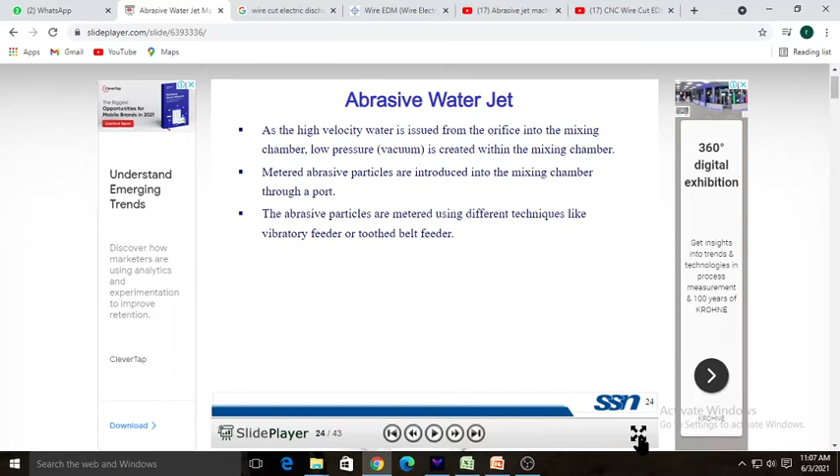Abrasive water jet machining, in short named AWJM. What is this abrasive jet machining?

As a high velocity water is issued from the orifice into the mixing chamber, a low pressure vacuum is created within the mixing chamber. The name itself tells that abrasive jet machining means machining by using the water jet, mixed with abrasive particles. Metered abrasive particles are introduced into the mixing chamber through a port, using techniques like vibratory feeder or toothed belt feeder.

So how are we going to achieve this? We are going to see in today's section.

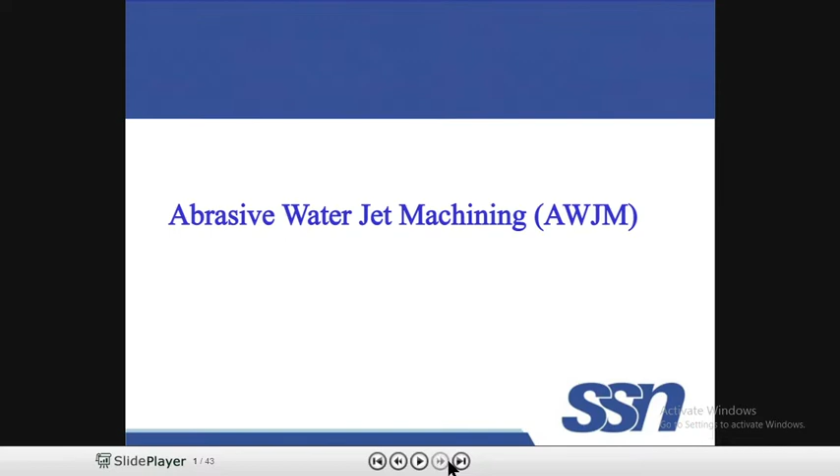What is this water jet machining or abrasive jet machining? It is suitable for cutting plastics, foods, rubber insulations, automotive carpeting and headliners. We are going to use this abrasive water jet machining. Harder materials can also be machined by using this AWJM.

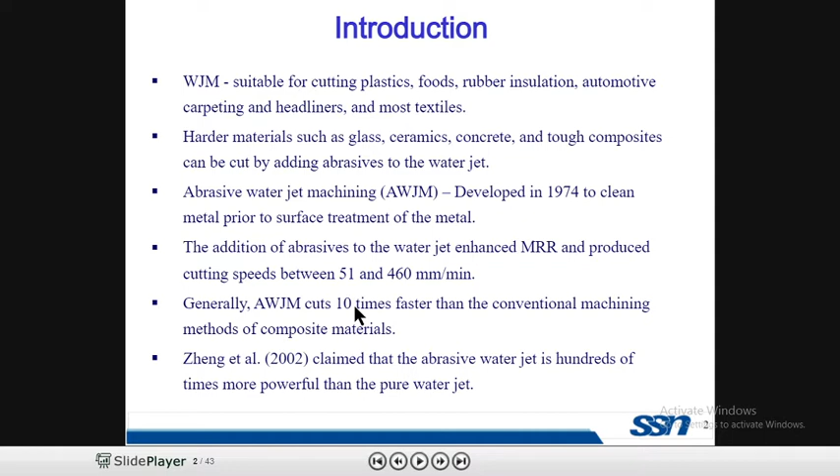It was developed in 1974 to clean metal prior to surface treatment. The addition of abrasives to the water jet enhances MRR, material removal rate, producing cutting speeds between 51 and 460 mm per minute. Generally, abrasive water jet machining cuts 10 times faster than conventional machining methods.

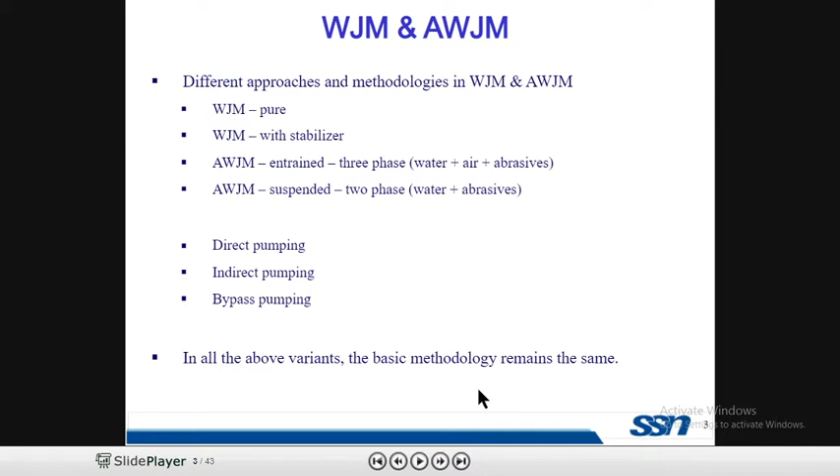If we use abrasive particles, it becomes abrasive water jet machining. Normally it is just water jet machining. There is a difference between water jet machining and abrasive water jet machining: the main difference is that in abrasive water jet machining we use abrasive particles along with the water jet.

The basic methodology is that water is pumped at sufficiently high pressure, 200 to 400 megapascal. The intensifier works as a device which intensifies the jet of water. Because of this, a high velocity of approximately 1000 meters per second jet of water is produced.

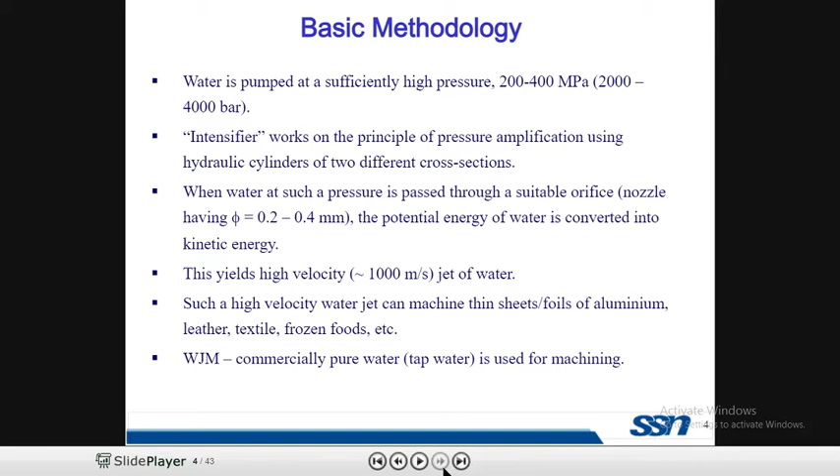Such a high velocity water jet can machine thin sheet foils of aluminium, leather, textiles, frozen foods, etc. In water jet machining, commercially pure water is used for machining, but in abrasive water jet machining we mix abrasive particles with water.

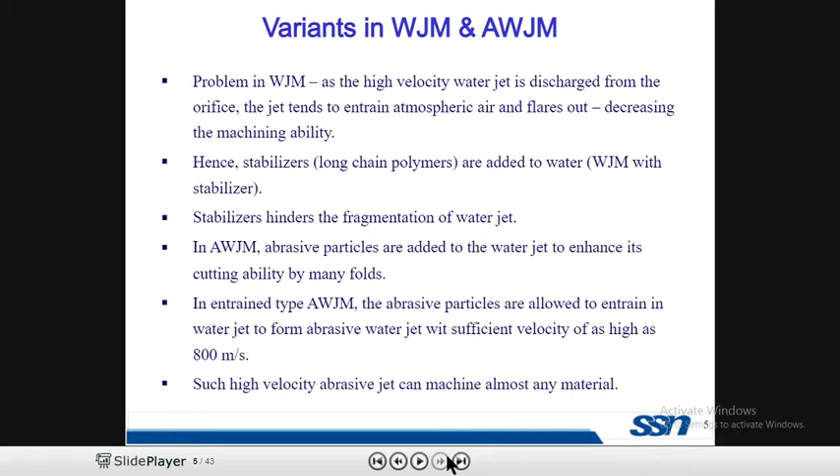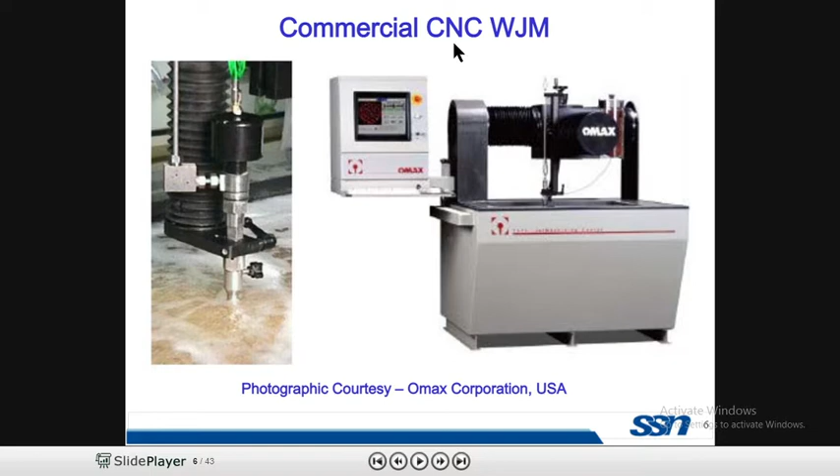In exam we only have to write the principle, construction, working and applications of water jet machining. The deep study is not present here. This is the schematic diagram of this CNC operated water jet machining.

The main applications can be paint remover, cleaning, cutting soft metal, cutting frozen meat, textiles, leather industry, mass immunization, surgery, peening, pocket milling. At all these places we can use the abrasive water jet machine for drilling and turning, and also nuclear plant dismantling.

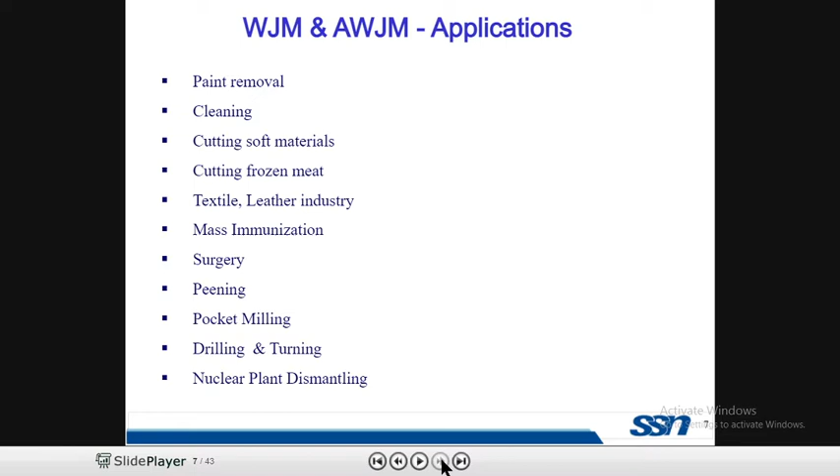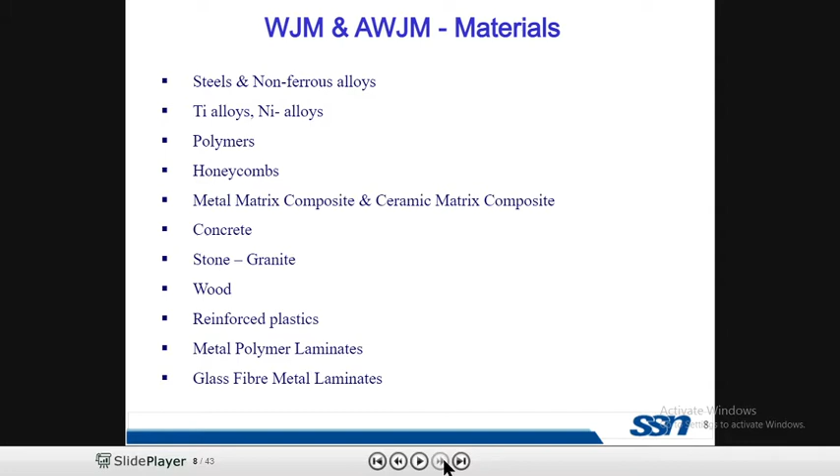The water jet machining and abrasive jet machining materials - on which materials can we use this? Steel, titanium alloy, nickel alloys, polymers, honeycombs, metal matrix composites, concrete, stone granite, wood, reinforced plastics, metal polymers, laminates, glass fiber metal laminates. All these are the materials on which abrasive water jet machining can be used.

The cutting ability of water jet machining can be improved drastically by adding hard and sharp abrasive particles into the water jet. Thus, water jet machining is typically used to cut softer and easier to machine materials like thin sheets and foils, non-ferrous metallic alloys, wood, textiles, honeycombs, polymers. Other than cutting and machining, high pressure water jet also finds application in paint removal, cleaning, surgery.

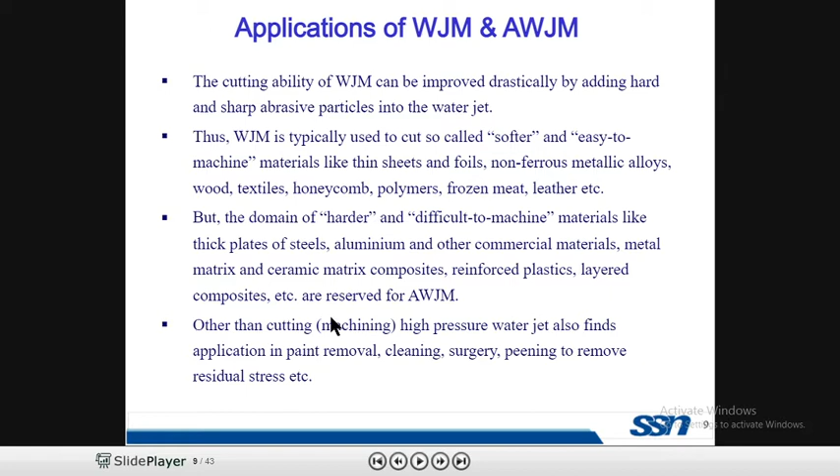It can also be used besides cutting for pocket milling, turning and drilling. One of the strategic areas for these various robotic abrasive water jet machining is finding critical application in dismantling the nuclear power plant. Dismantling means removing or disposing of the nuclear power plant. At that time also this water jet machining finds its particular application.

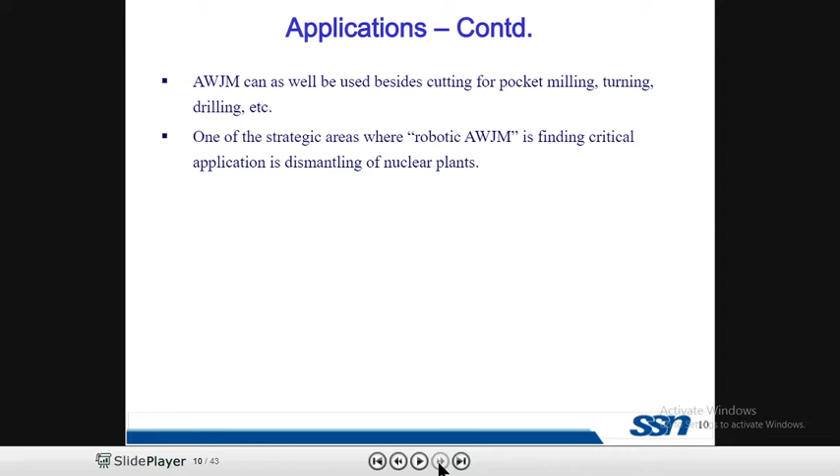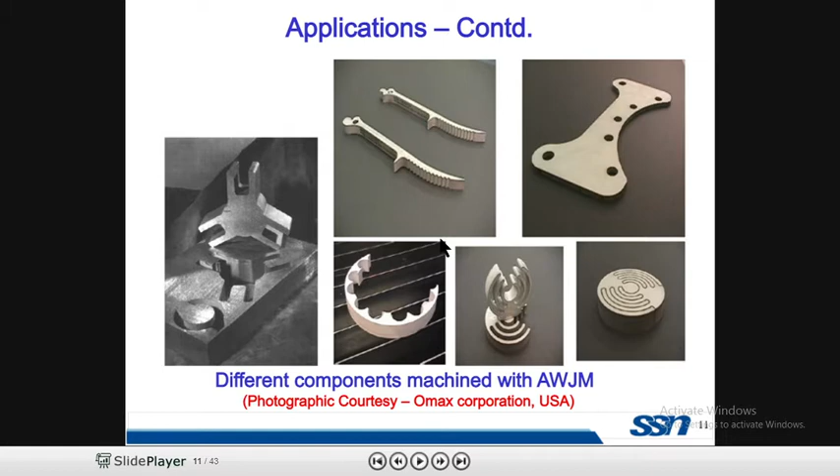These are some applications, or some samples which are created by using the abrasive water jet machining. I will show you one video of this abrasive water jet machining also.

The advantages of this are extremely fast setup and programming, with very little fixturing for the most part. It can machine virtually any 2D shape of any material. There are very low side forces during machining, almost no heat generated on the parts, and it can also machine thick plates.

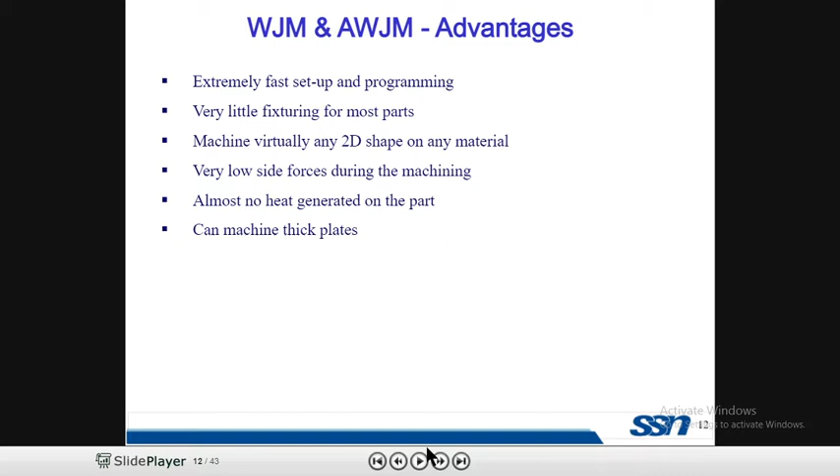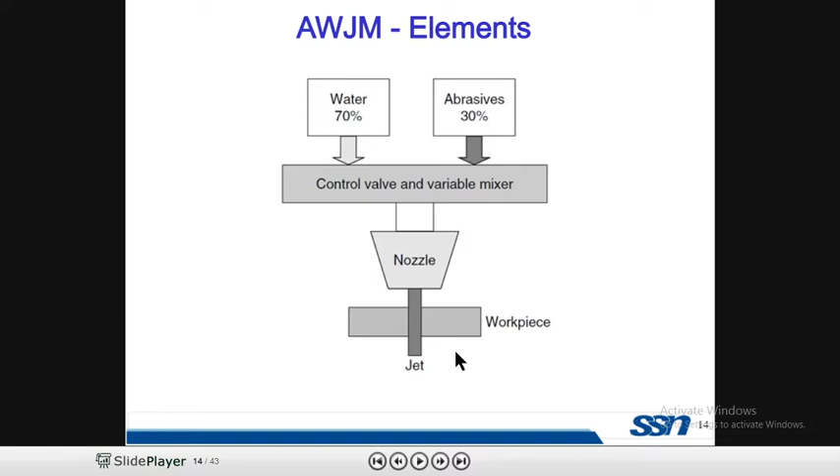70% water and abrasive particles are mixed together and forced through a nozzle in the form of a jet onto the workpiece, producing machining there. It is named abrasive water jet machining.

In abrasive water jet machining, the water jet accelerated abrasive particles, not the water, cause the material removal. After the pure water jet is created, abrasives are added using either the injection or suspension method. The important parameters of the abrasives are material structure, hardness, grain shape, size and distribution.

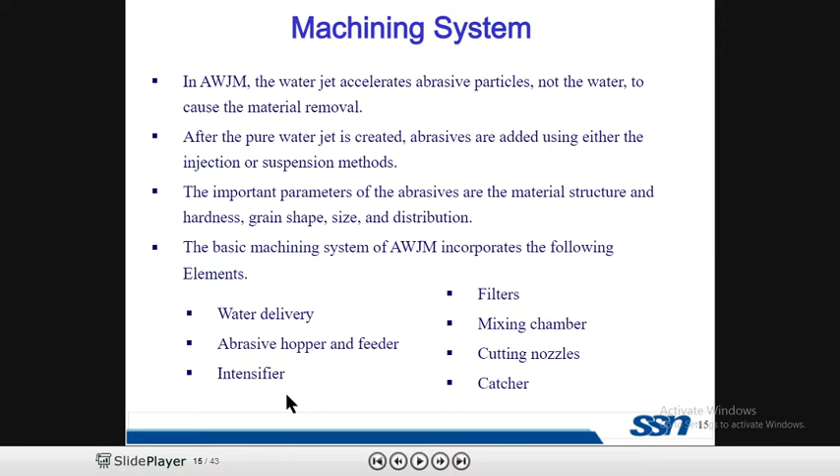The basic machining system of abrasive water jet machining contains water delivery, abrasive hopper or feeder, intensifier, filters, mixing chambers, cutting nozzles, and catchers. So this is the brief diagram.

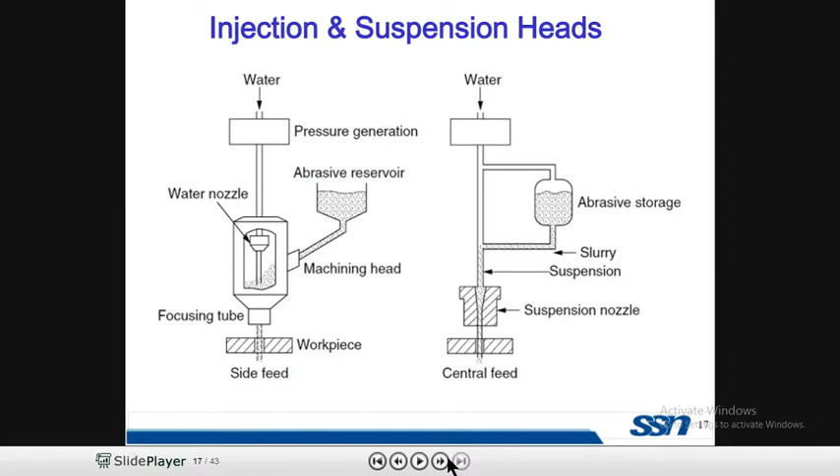That's an intensifier. This intensifier is driven by the hydraulic motor or hydraulic power pack, and it intensifies the water jet here.

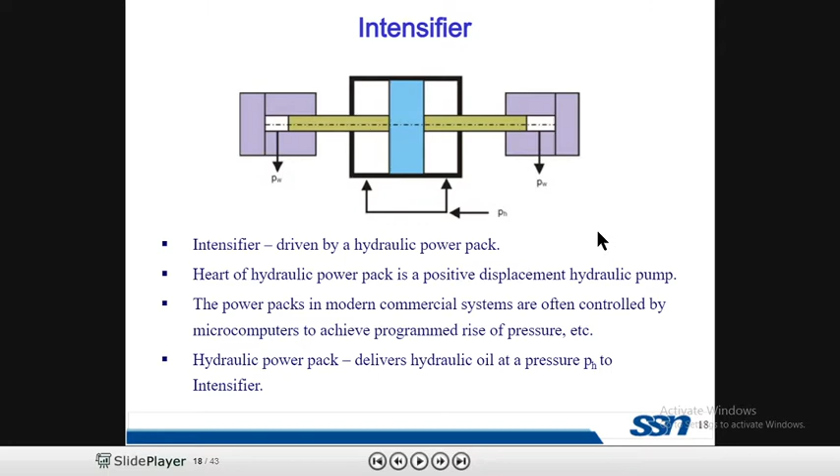We don't need to study all this in depth. We just need to know the working and construction, the working principle. We are not going to study it in deep.

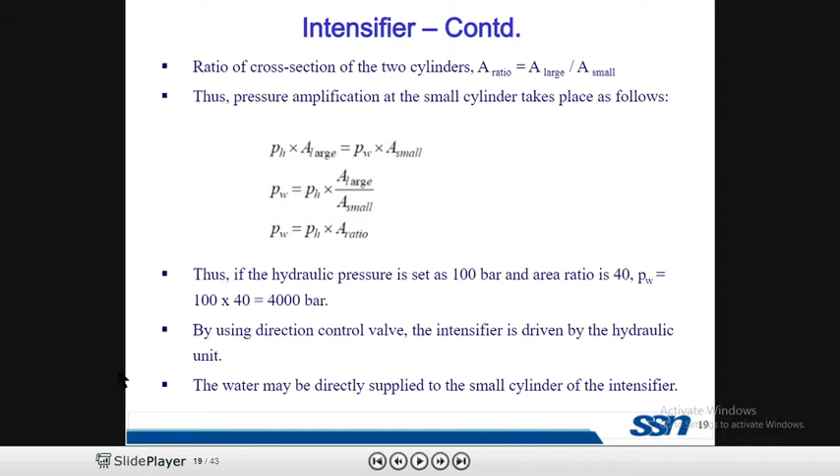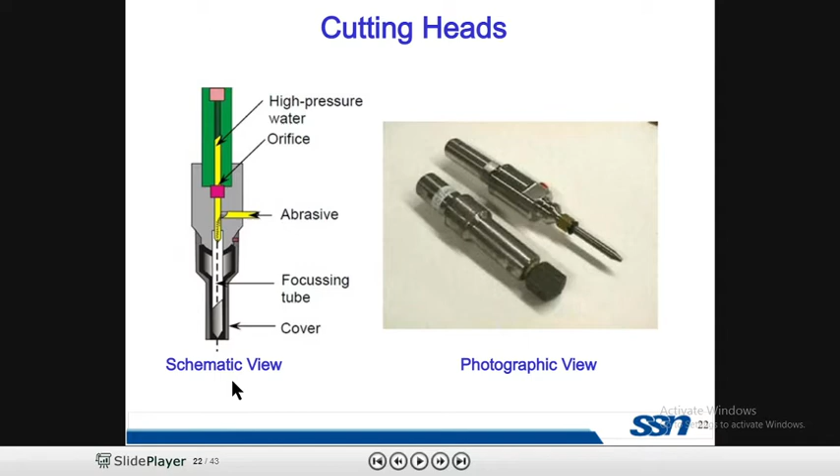Here you can see the cutting head, which has an orifice. Water comes through the orifice, then abrasive particles are added to the jet, and it is focused on the workpiece here.

As the high velocity water is issued from the orifice into the mixing chamber, a low pressure vacuum is created within the mixing chamber. Metered abrasive particles are introduced into the mixing chamber through a port, using techniques like a vibratory feeder or toothed belt feeder.

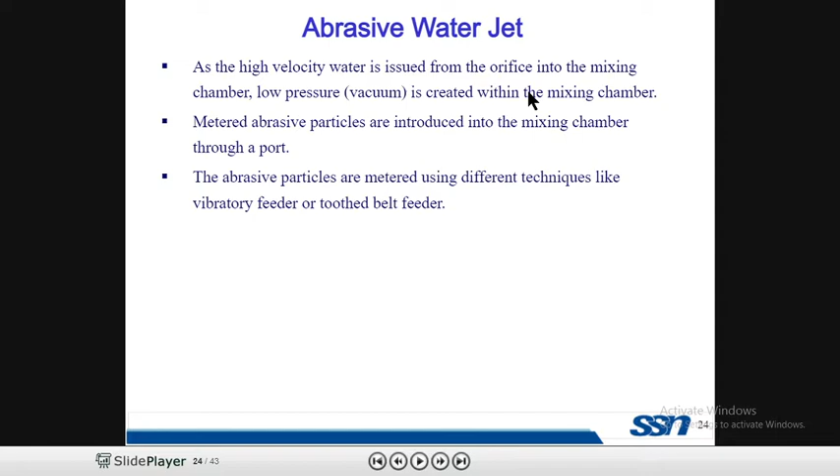In this way, we can achieve abrasive water jet machining. Here I am going to show you a video of this abrasive jet machining, so you can see how they actually achieve it. This is the nozzle through which a water jet along with abrasives comes out, moving on the workpiece and producing the desired machining there.

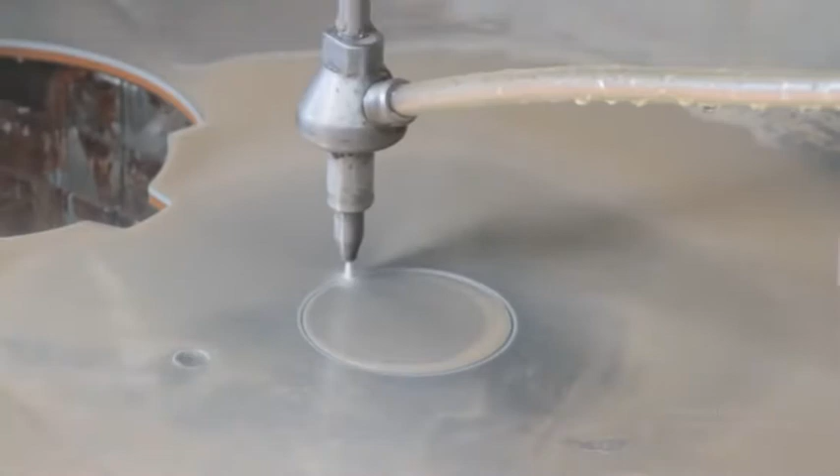A circular cutting is going on there. You can see the desired shape in any form can be obtained by moving the jet. Sometimes the jet is fixed and the workpiece is movable. Any type of shape can be cut here.

This is a computerized numerically controlled water jet. Without producing heat, it is machining here.

You can see how sharp the cutting is, and you can see the pressure of water which is produced by the intensifier.

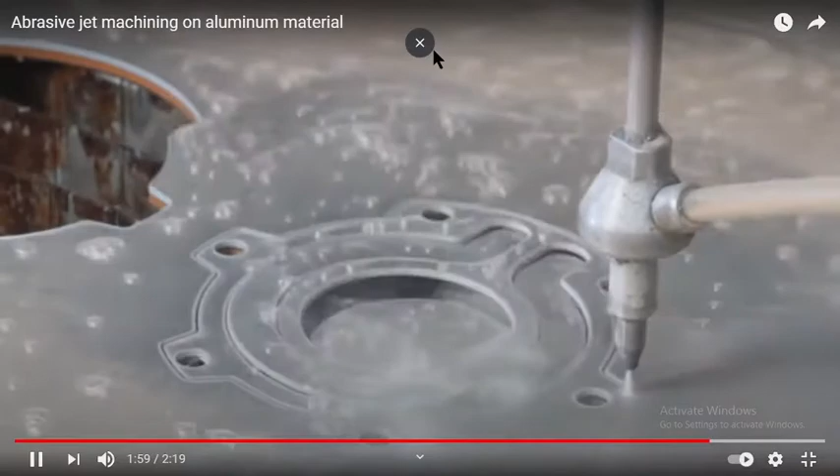You can see that any shape can be machined by using this abrasive water jet machining here. You can see the component here.

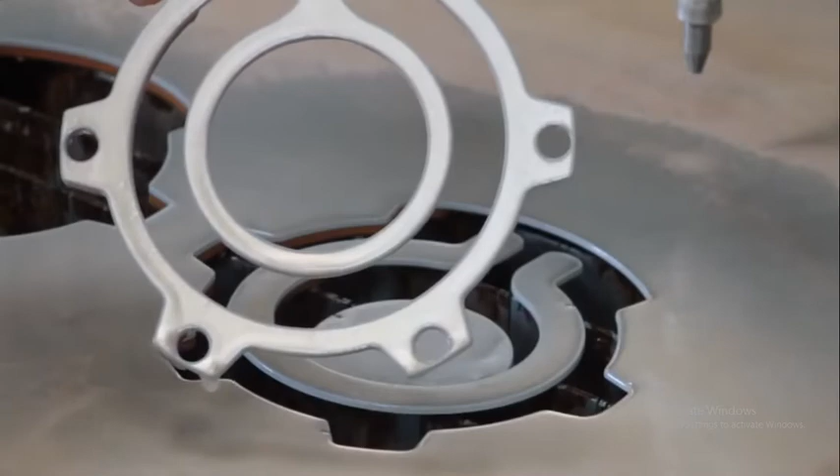Okay, so I think you get this topic of abrasive water jet machining. Now we are going to see today's another concept, which is electric wire discharge machining. Before starting this, I will show you the image of this.

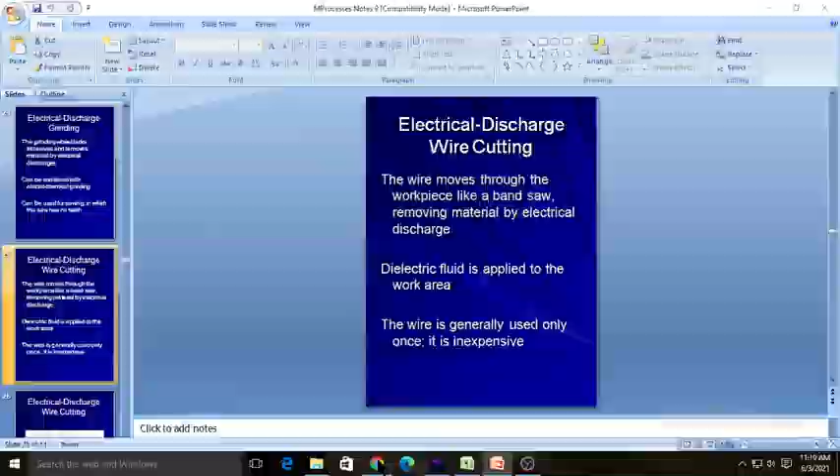Here you can see this is wire electric discharge machining. The name electric discharge machining means we use an electrode and remove material by creation of a spark. So here it is wire electric discharge, meaning the electrode is in the form of a wire.

As this wire is in the form of an electrode, when it is continuously moving through the workpiece, it produces a spark. Now we can move the workpiece or this wire electrode, and in this moment the spark is created and cutting of the workpiece is performed.

Now you can see that as the discharge spark is created and cutting takes place there, there will be the creation of heat.

So to eliminate that heat, we use deionized water as a cooling agent. You can either completely immerse the workpiece, or make a coolant nozzle arrangement, so that the workpiece will not get heated, the system remains cool, and thermal stresses will not be developed there.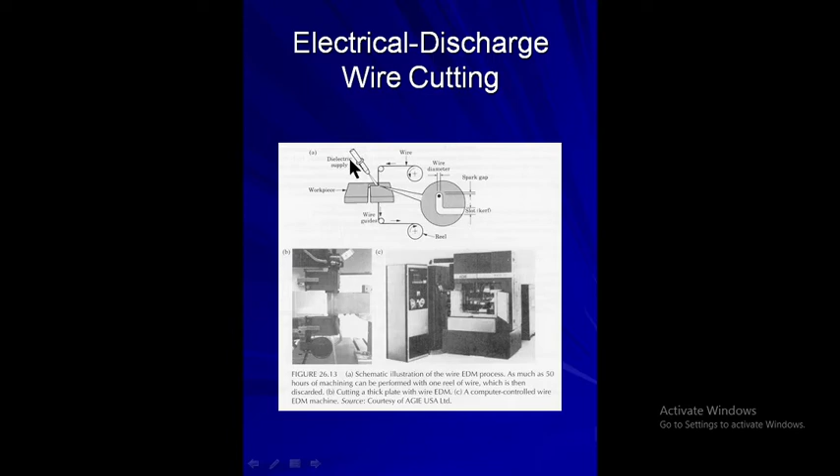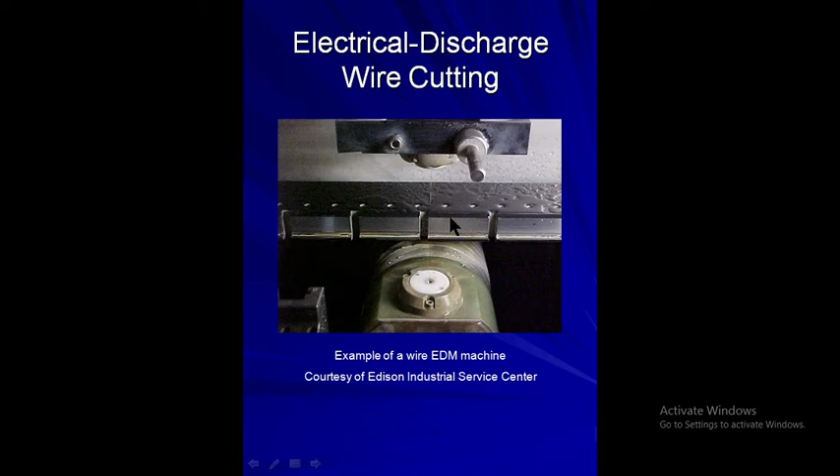Here again you can see the diagram. The wire is continuously feeding to this workpiece in a vertical way, and dielectric fluid is supplied there, which you may also call a coolant. This is the general machine of wire cutting. You can see this is the workpiece, and on this workpiece this wire is working as the electrode vertically, continuously moving through the workpiece, producing the slot or the machining.

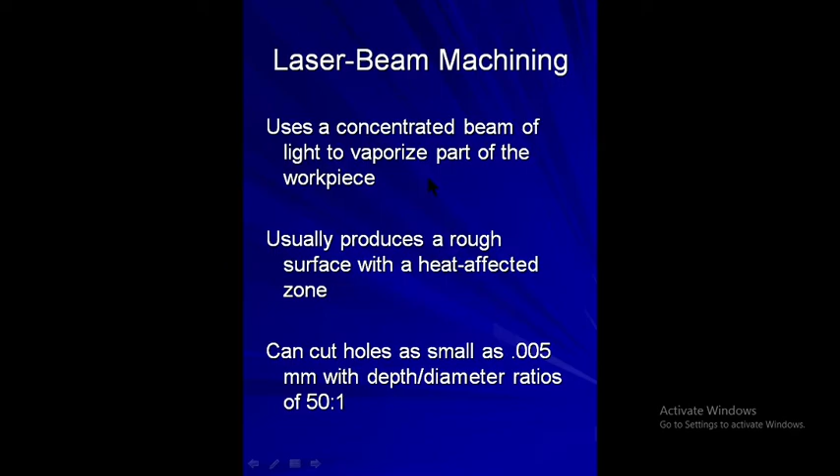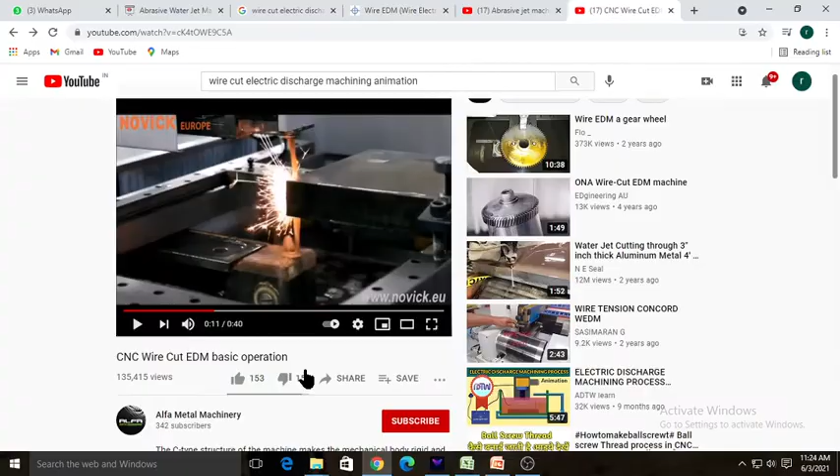Okay, so these are some tools which are created by using this wire cutting process. Here I am going to show you a video.

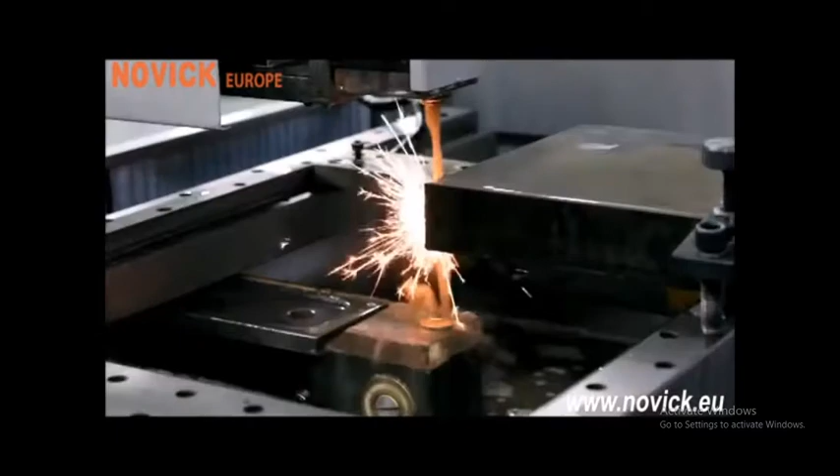Here you can see this wire, when it comes in contact with the workpiece, creates a spark. We are applying water, deionized water, as a dielectric medium, and as this wire moves forward, a spark is created along with it, and the cutting or slotting operation in the workpiece is performed.

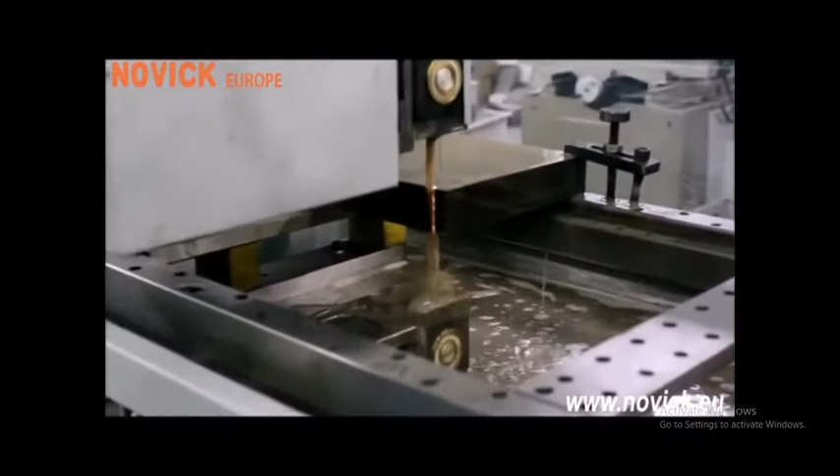You can see it on your screen. This is the dielectric fluid there, deionized water.

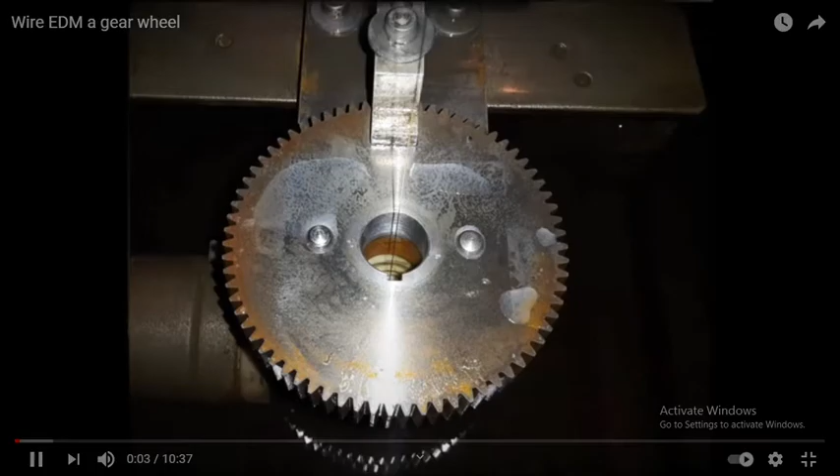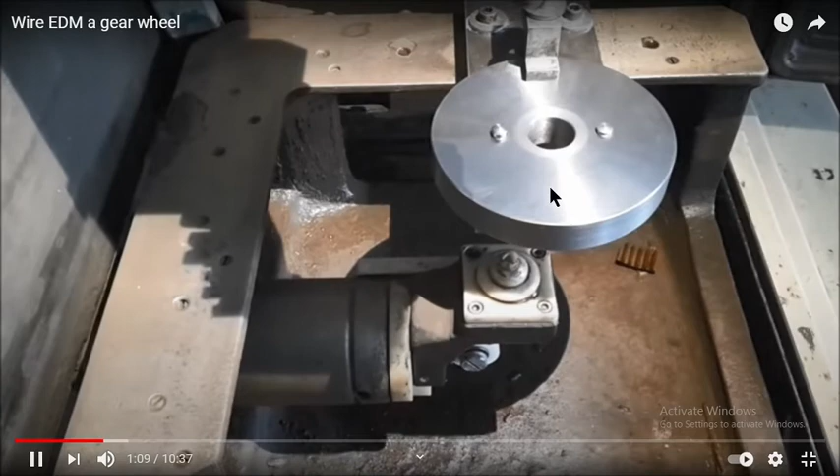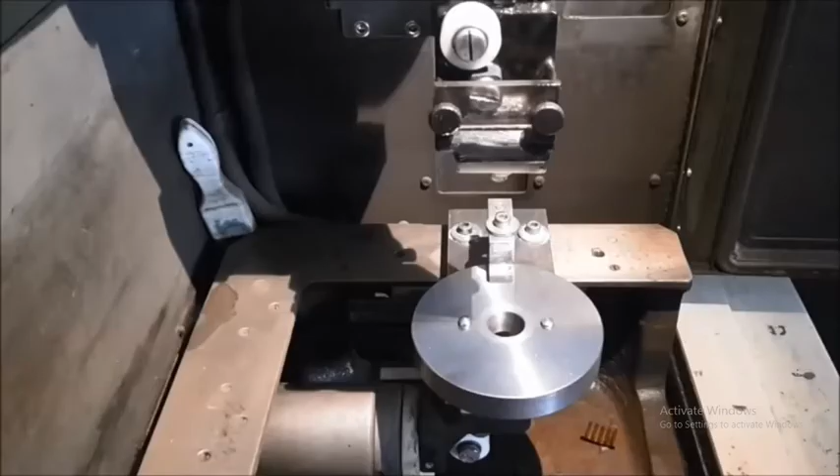Here you can see that cutting of a gear also takes place. Here is the wire electrode, and we are going to make a gear wheel. You can see when this wire comes in contact with this workpiece, it passes through the pre-drilled hole. Now this wire electrode is coming, and we are going to enter it into this gear wheel.

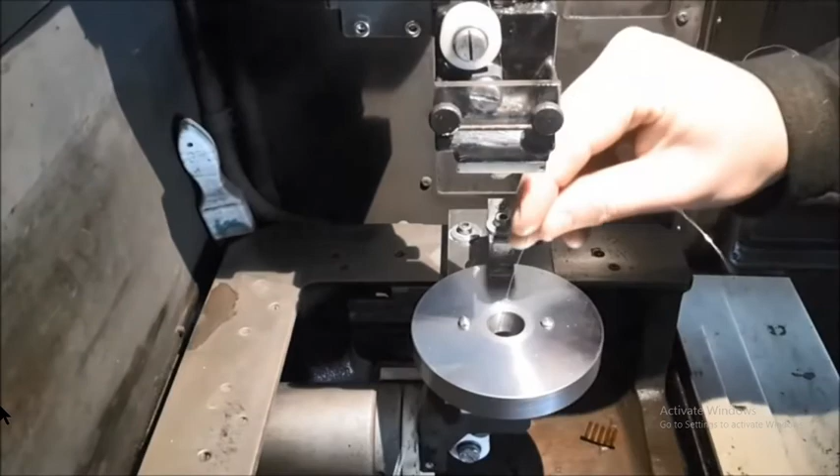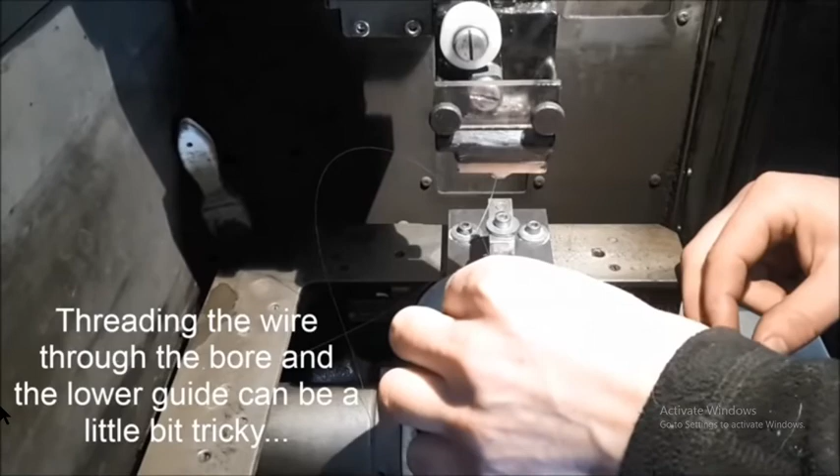You can see here this tiny wire is used to cut the gear. As this wire is too thin, it is inexpensive, and it wears out in this process, so we are going to use a new wire every time. Reuse of wire is not allowed here.

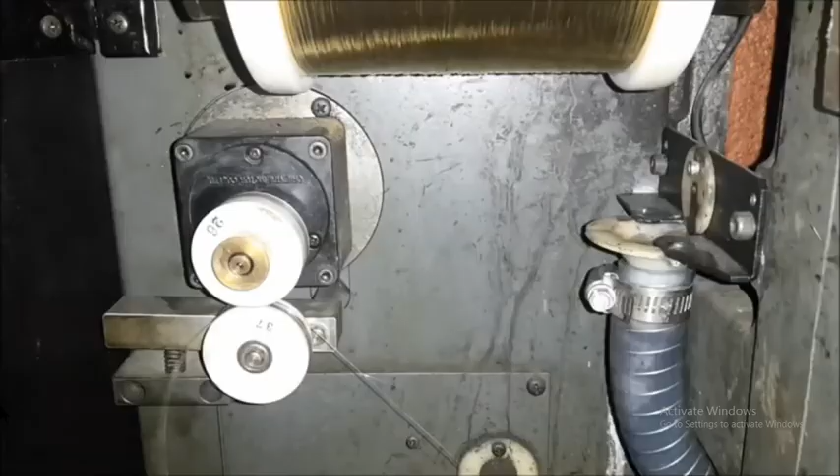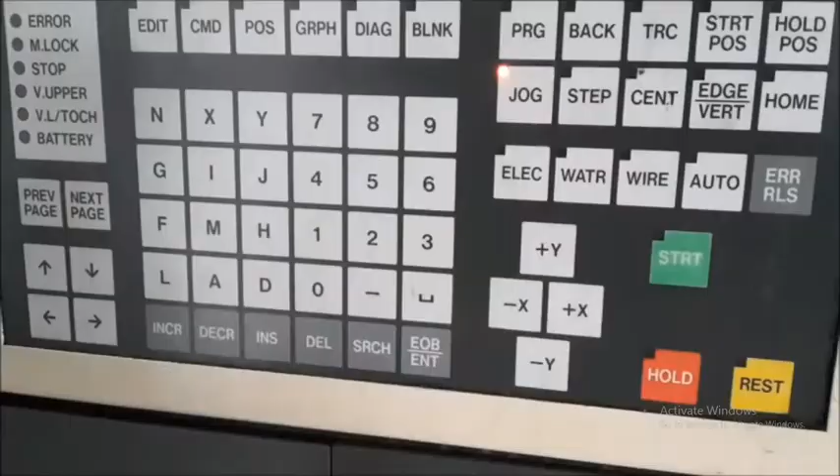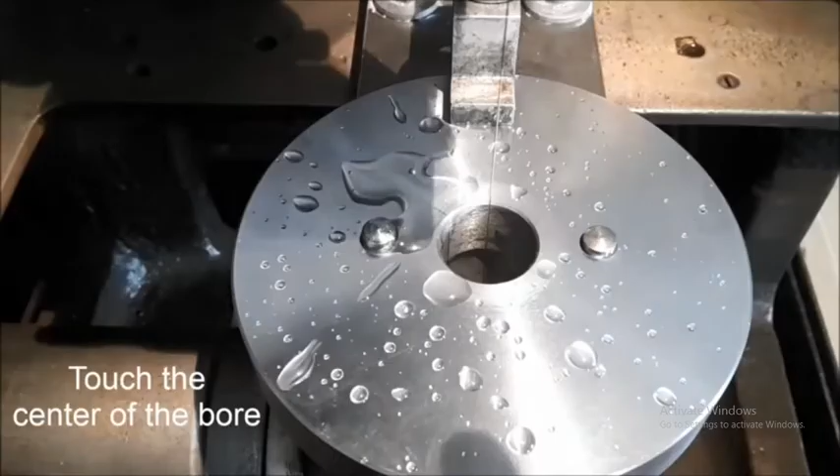Now this wire is installed on the pulleys. You can see these are the pulleys which make the motion of the wire through the workpiece in the vertical direction. You can see the wire arrangement here. Now this wire has touched the center of this bore.

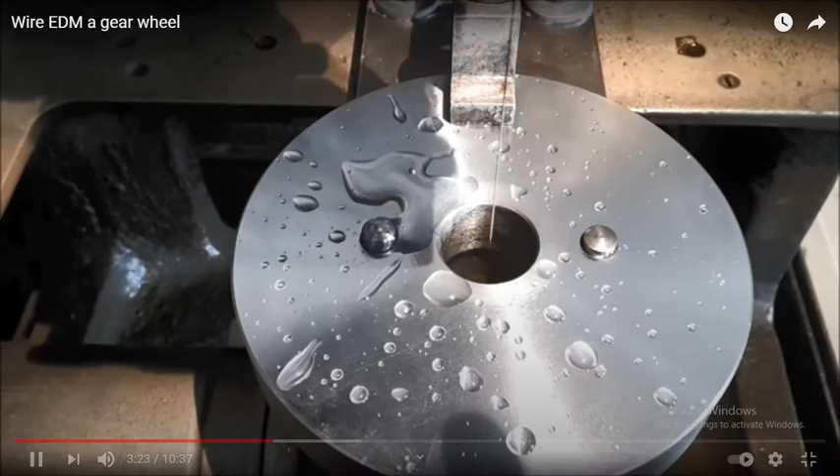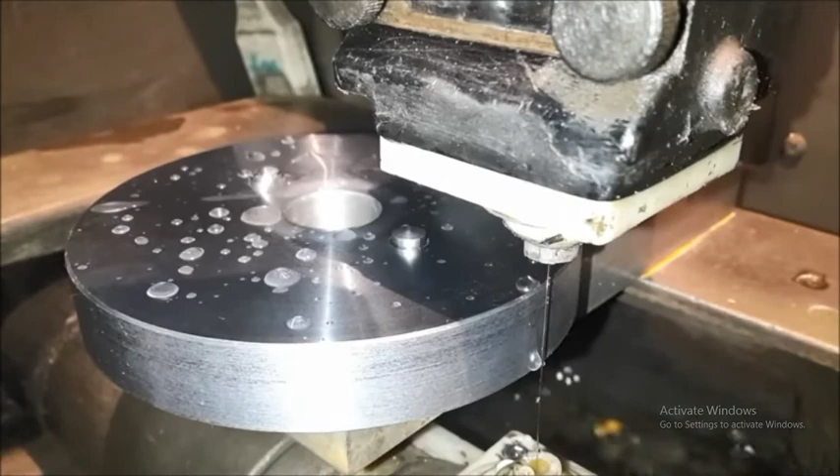This motion is controlled by a CNC. Both external and internal machining are possible here. Sometimes the workpiece is completely deep in the water, sometimes a water jet is used.

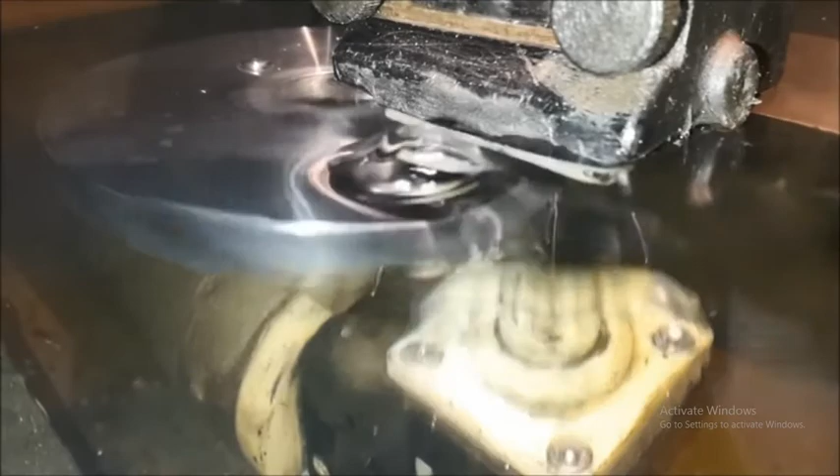You can see here this wire comes in contact with the gear and produces the teeth. There is a continuous motion of the wire, and it starts producing the spark and starts producing the cutting or slotting effect. The motion of the wire is computerized and numerically controlled.

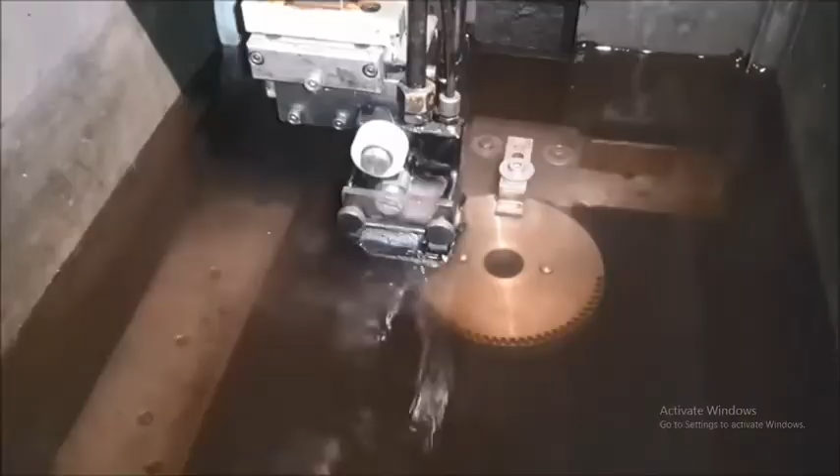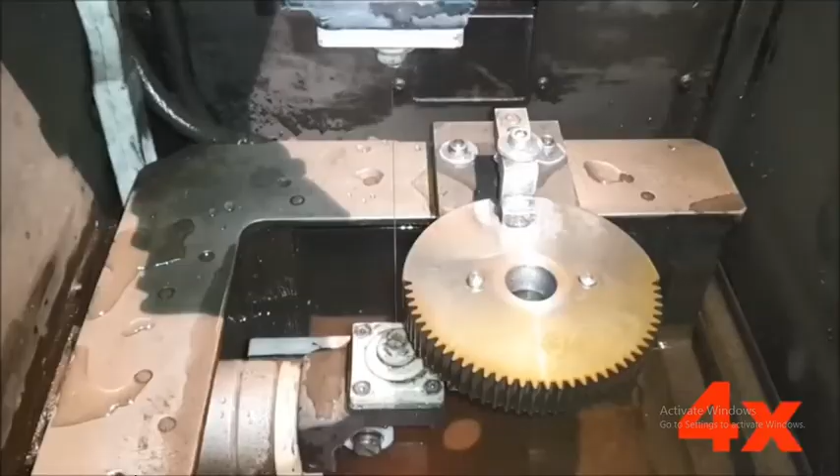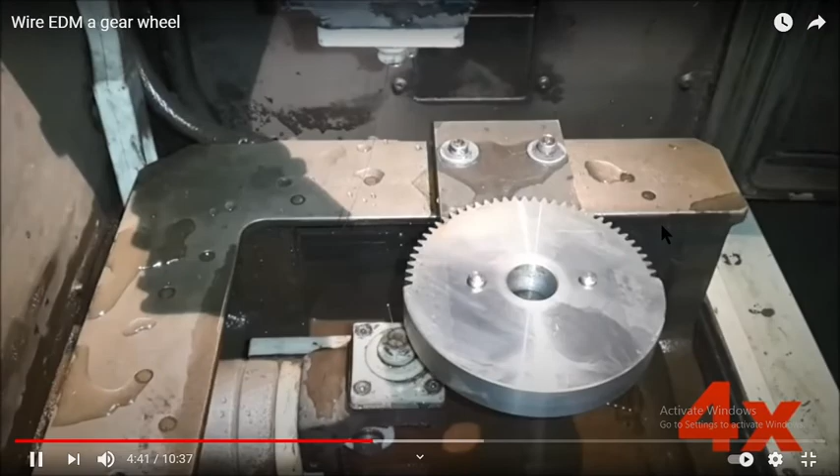This is the work in progress, as half of the cutting of the gear is completed here. Now the next half is going to remain, so they just move this workpiece and the working of the next half is starting now.

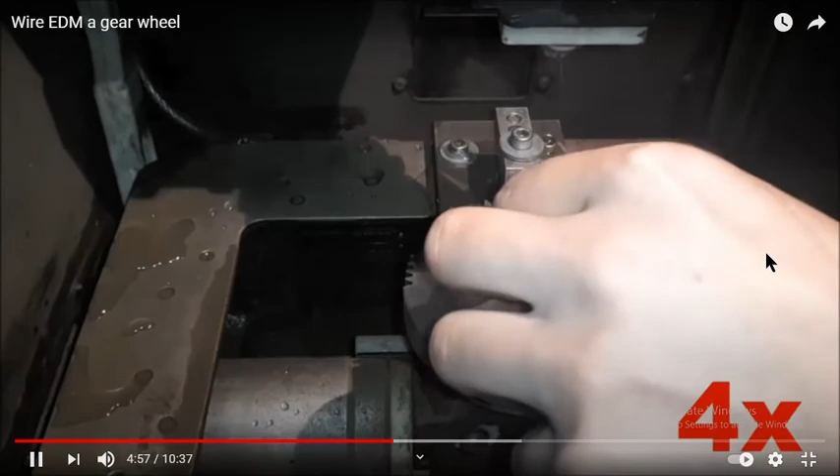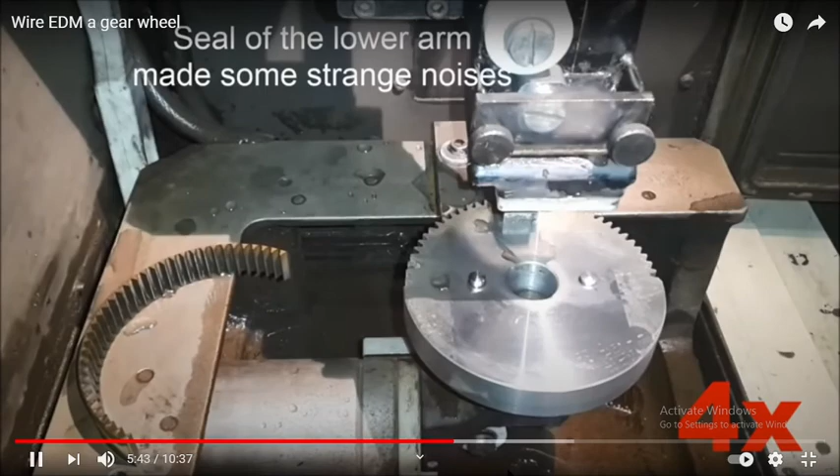This is just for the setting purpose. To check the correction in dimension, they are making this setting. He cut this, now they got the perfect center. Now again they are going to feed this wire, making this wire arrangement. Before this, in this drilled hole, they adjust the center of the drilled hole for proper cutting of the gear.

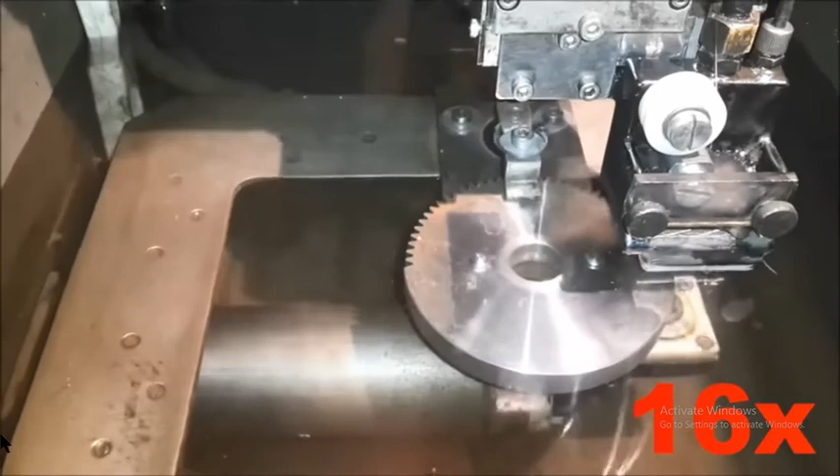As the workpiece thickness is too high, so they completely immerse it in a fluid.